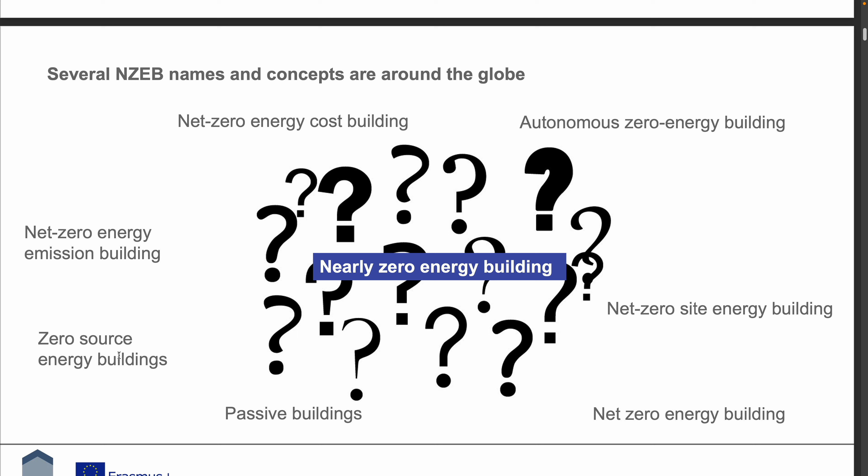So concepts of NZEB buildings. We're gonna discern small n and capital N later. And we're also gonna discern these types of terms. So what is most interesting for us is the autonomous zero energy building, which is not grid tied. But we also have net zero energy cost building, net zero site energy building, net zero energy building, net zero energy emission buildings, zero source energy buildings, and last but not least, passive buildings. So let's have a look.

Overall, this is basically a definition by the United States Department of Energy, which says a zero energy building produces enough renewable energy to meet its own annual energy consumption requirements. Sounds pretty straightforward, right? So let's get into more complicated things. We have 4 types of NZEBs, and look at that. It's like capital N now, comes very soon.

And so NZEB A, footprint renewables net zero energy building, means that the sources are integrated within the building. So it means that there's a PV on the roof and potentially other systems that are integrated in the building. B means these systems can be on site, don't necessarily have to be connected to the building, but can be in lots or adjacent open space, such as a parking lot or maybe a structure in the garden, something like that.

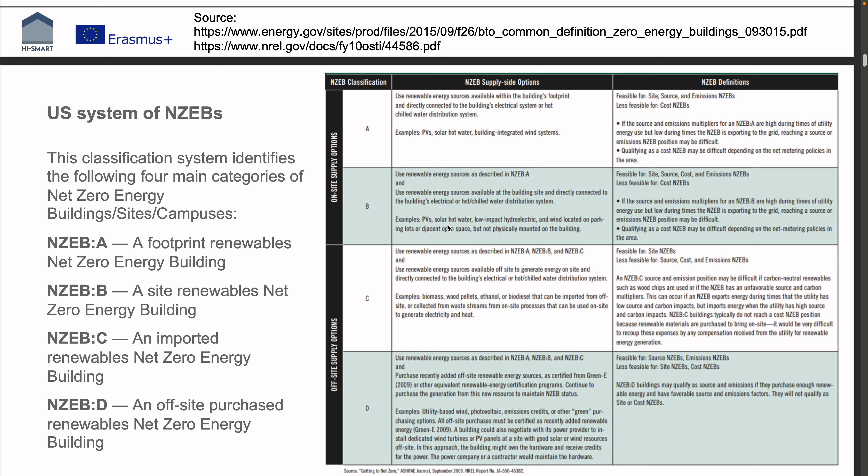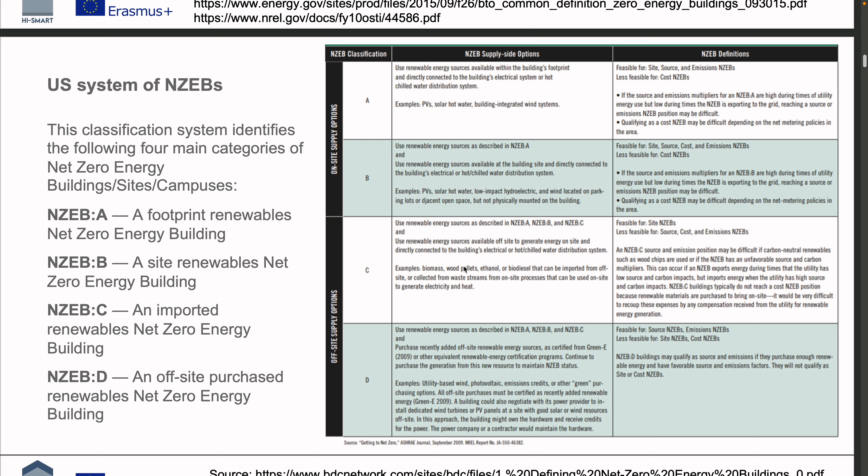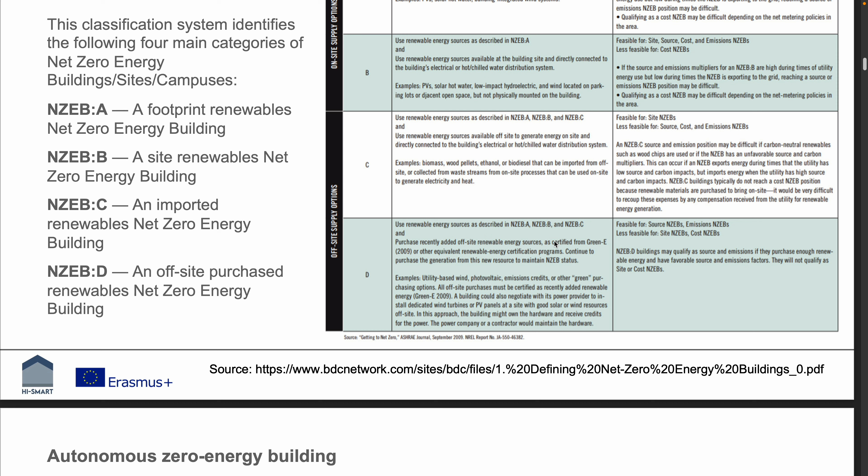C means that it is still net zero energy, however, the energy is imported, and so this case actually incorporates having, for example, a pellet heating system, which means that the pellets have to actually be imported from offsite. And D, last but not least, combines A, B, and C, but also says that the imported energy has to be certified, which is basically another legislative. So we're not gonna dive into that anymore.

This is the most interesting thing, because the autonomous zero energy building is not grid tied, which means it operates completely independently from any external energy infrastructure or source, and therefore it has to produce its own energy.

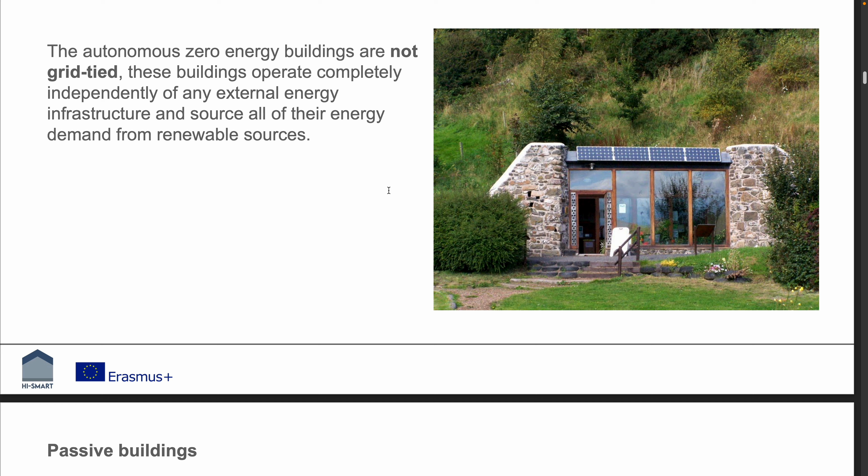Passive buildings are very interesting as well. The thing to say here is that passive buildings are usually not incorporated in legislation in countries, because the passive building standard is kind of an independent standard defined by the German Passive House Institute in Darmstadt, and the rule of thumb is that it uses up to 15 kilowatt hours per square meter per year for heating and cooling. It can be defined by the 0.6 air changes at 50 pascals pressure.

Basically, Passive House Institute uses their own software. Well, software is maybe too strong a word for that. It is basically a macro Excel for calculating the energy consumption of the building, and this Excel then determines whether it falls under the passive building standard.

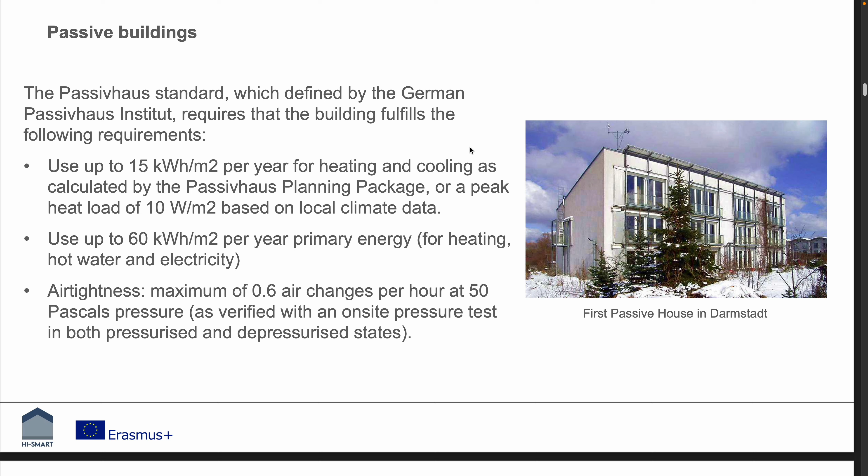As I said, it's usually not incorporated in legislative, so it's kind of an independent point of view, which is really nice because it can therefore be used worldwide. So a net zero energy building receives all necessary power through renewable resources and is not dependent on fossil fuels or existing infrastructure. Well, this is very general to say, so let's move on to net zero site energy building, which implicitly says that the energy should be generated on site.

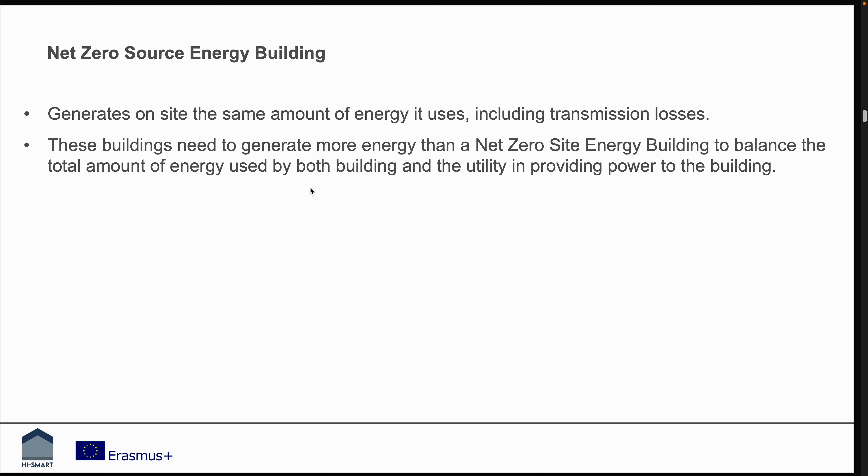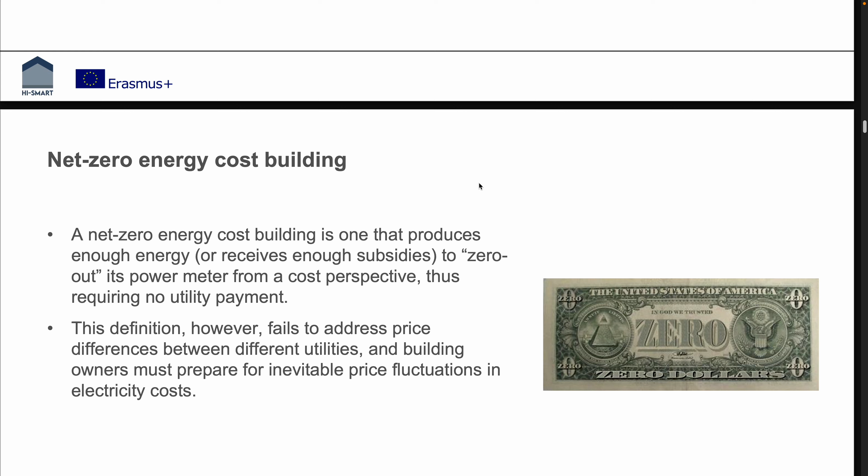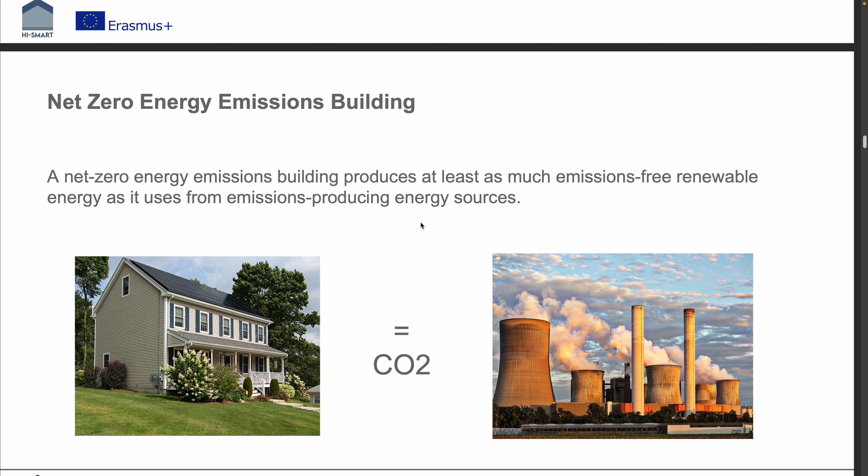And so this one, as opposed to the net zero site energy building, also includes producing enough energy to cover the transmission losses. And so in reality they need to generate a little bit more energy, because it's the point of view from which you're looking at it. Net zero energy cost building is the perspective of cost, and this is not really the best way to look at it, because the cost is variable throughout time, so I wouldn't really use this. Net zero energy emission building means just focus on the emissions there.

And now finally we're getting to discerning what small NZEB and capital NZEB means. The difference is that capital NZEB means that the primary energy use throughout the year is zero. Does it mean it's autonomous? No, it can still be grid tied. That's important to discern. However, it's different from small NZEB, which is a nearly zero energy building, and it literally means that the primary energy use can be more than zero. We're gonna dive into that.

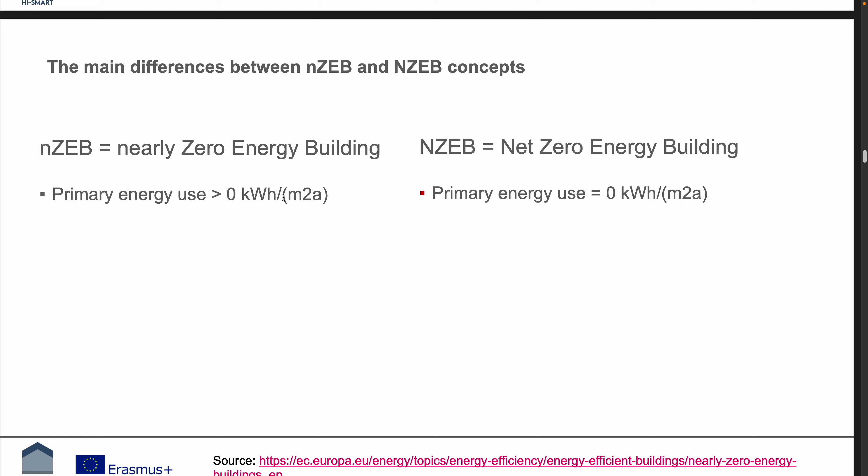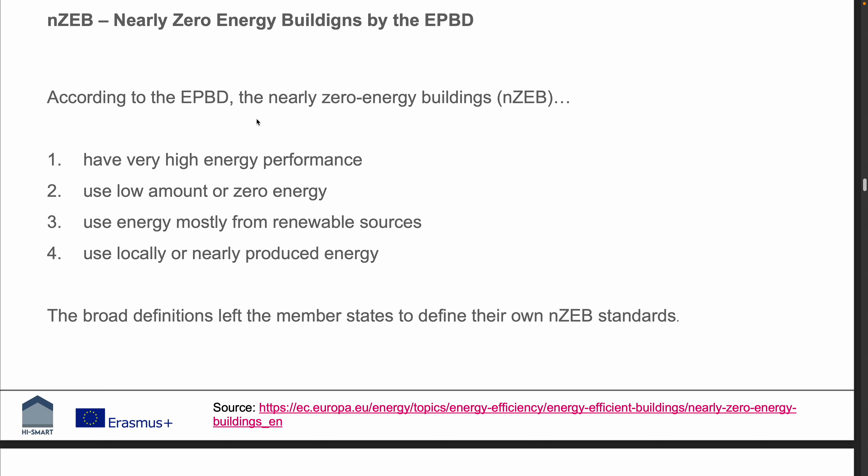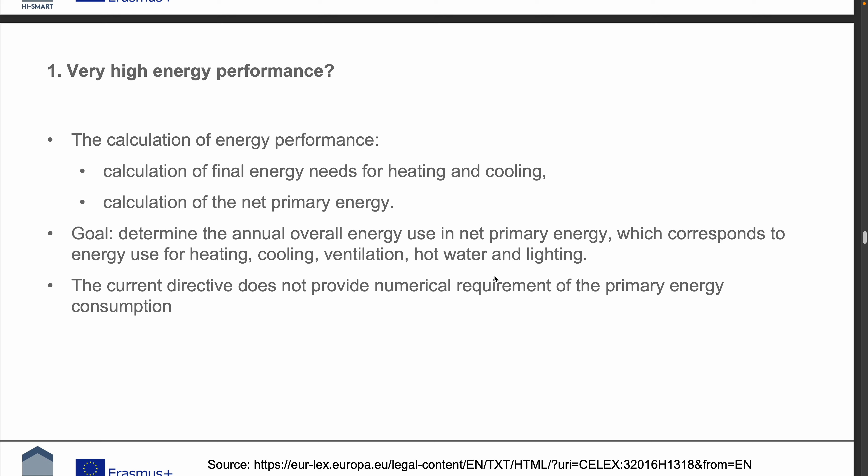But what it means, for example, for single family houses is the annual energy consumption per square meter, which should be anywhere from 15 kilowatt hours per square meter a year to 30, which, as you can see, is more than the passive building standard. So it's more energy demanding, and therefore less efficient. So we could say the legislative is kind of loose, and if you decide to design a building in the passive standard, it's still going to be more efficient than what the legislative as of now demands, right?

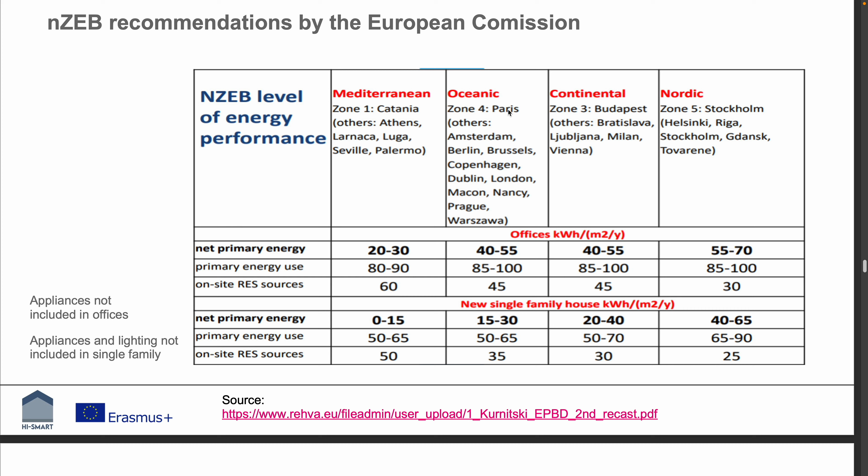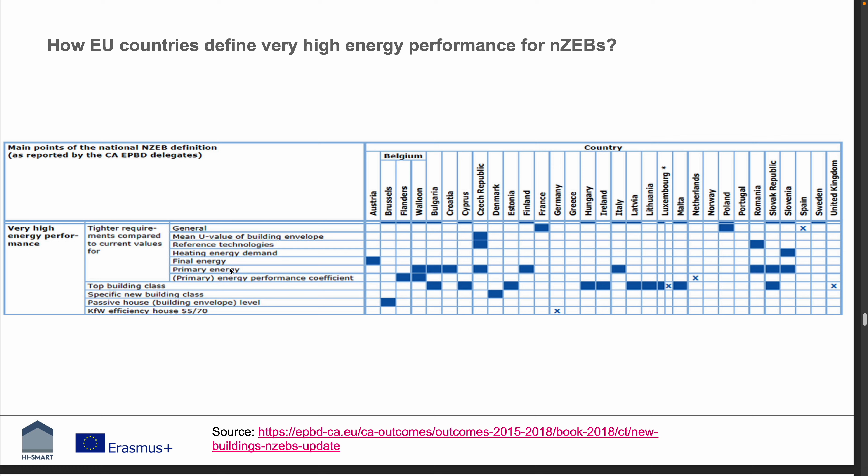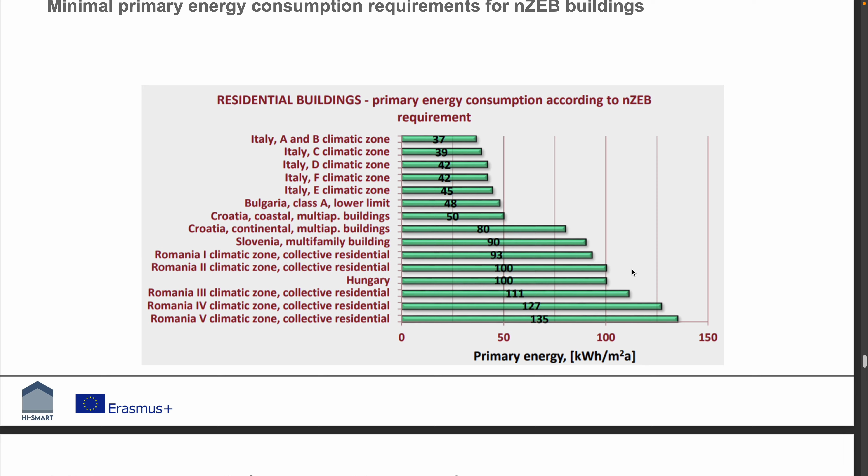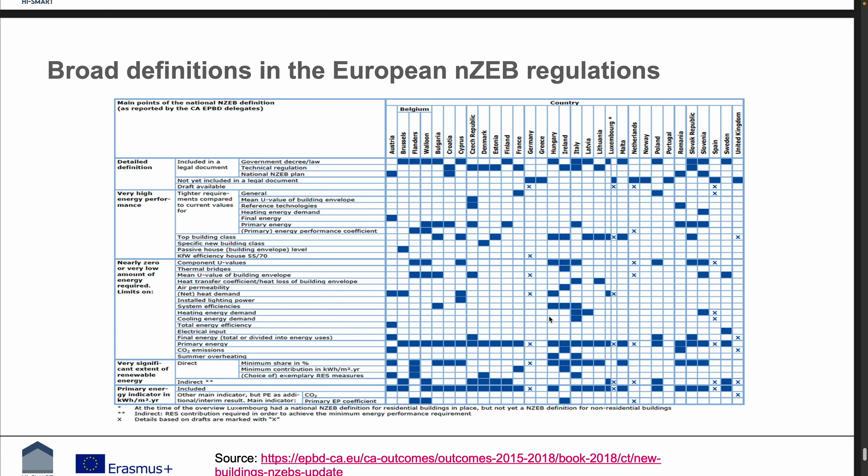Legislatives differ. And we also can see different climate zones, different energy consumption, according to the same NZEB standard. So what it actually wants to illustrate is that the same standard doesn't have the same specific energy consumption everywhere because it's adjusted by the climate zone. Good. What was the last thing here? Yeah, these are some simple schemas. Thank you for your attention. That was it. So pretty much we defined small NZEB, capital NZEB, autonomous buildings, and some other terminology to describe buildings. And what we are trying to achieve in the best state of things is the fully autonomous building.

Thank you. I myself had the chance to work with these systems. I will mention especially the rainwater collection system. There was one instance of that system that I worked on from the design phase to actually building it. And so I can provide experience not only on the theoretical side and design of those systems, but actually on what it means for the user to take care of systems like that, for them to be maintained well and work as long as they need to.